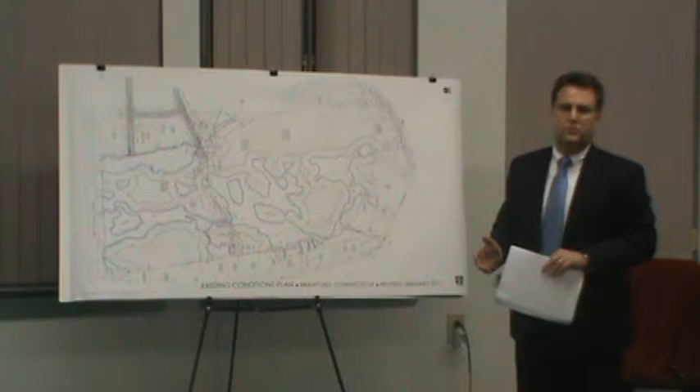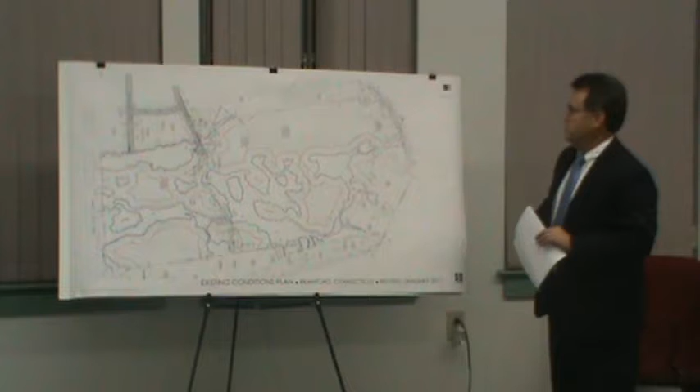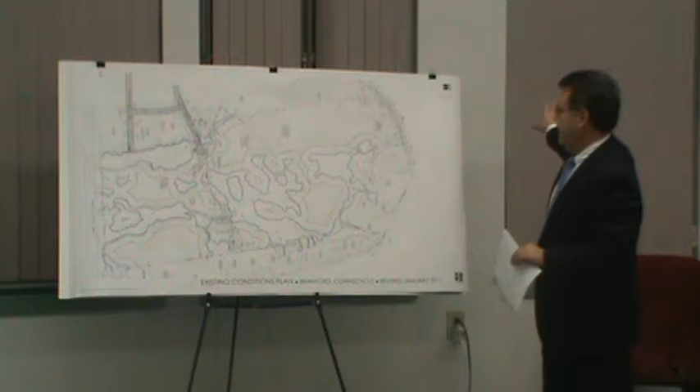Mr. Chair, what you see before you is quite a large scale, probably not an acceptable scale if this project moved forward in greater detail before this commission. It's an 80 scale drawing, compiled this way so it could fit on one sheet. North is to the right, Route 1 is along our bound here, and I-95 is along what would be the southerly border. The site is about 135 acres.

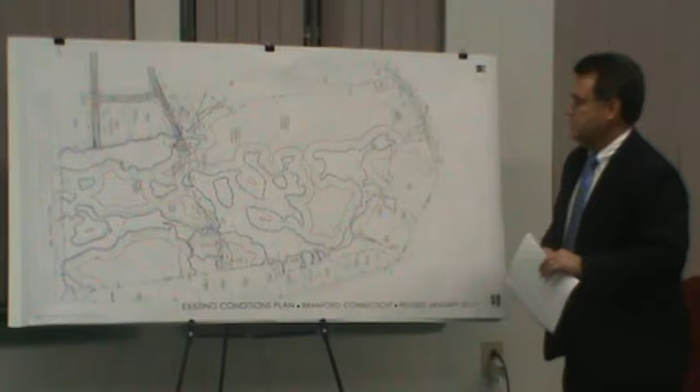The upper 80 acres or so was previously in front of this board for development by a particular user, a company that currently owns property here in Branford. The map shows 2-foot contours and delineation of treed areas. This is aerial photography updated with physical boundary located on the ground, as well as wetland flags that were field verified and field located. We paid close attention to the previously approved wetland flagging for the entire upper 80 acres.

Our knowledge of the lower 40 plus acres is that no project was ever proposed for that site, but those wetlands were also field located, staked, and then surveyed. This work was done in the fall of 2010, and this represents an existing conditions map.

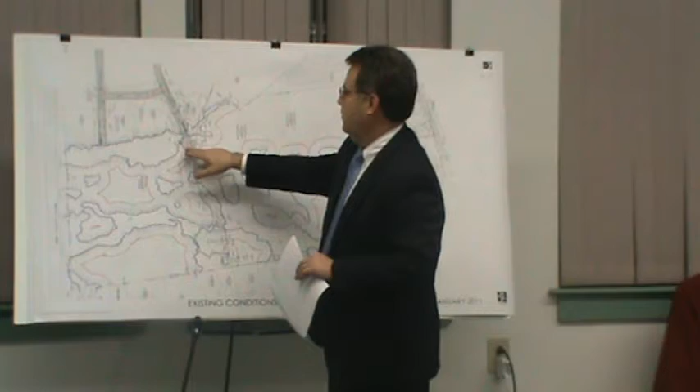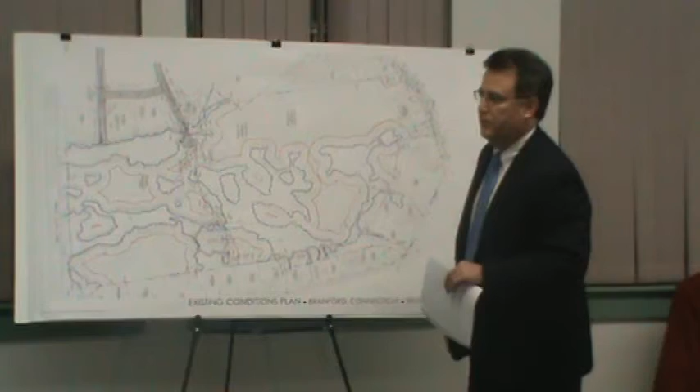Our site is fronted by Route 1, which any development will obviously connect to, but by combining the two parcels together into one cohesive development, we also benefit from 2 other already legally deemed access points. One is an extension of an easement already in place for grading, utilities, and right-of-way off of East Industrial, as well as easements and legal mapping requirements to extend Sycamore Way into any type of development on this site.

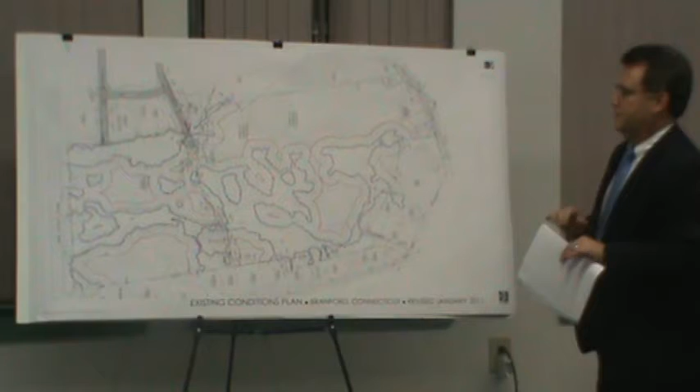In blue, we've highlighted the wetlands, with the flag numbers shown. In red represents a 100-foot setback, or the upland review area.

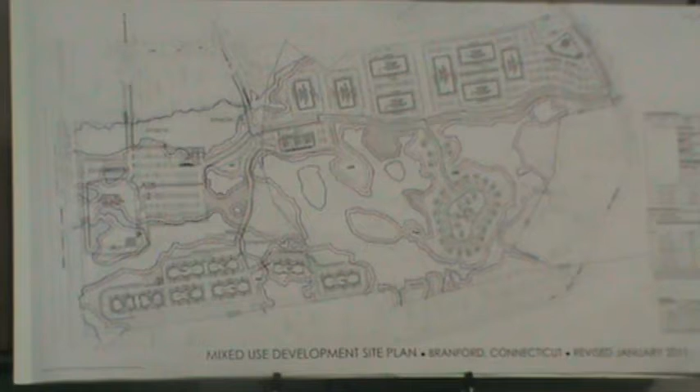We are bounded to the east by the town line. There's a small portion of our property, similar to when the application was before you last, that is actually in Guilford. But much like that project, no work and no access would be contemplated to Guilford, at least as preliminarily discussed.

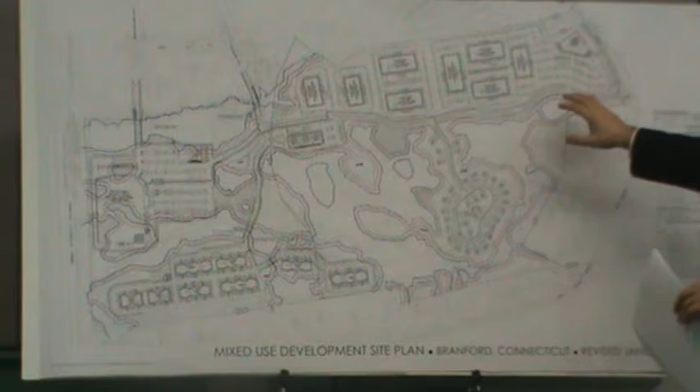So, if I may, Ray, go to the site plan first. Again, we are in conceptual development on this site. Right now, should the applicant move forward through a PDD development plan, it would be of mixed use variety.

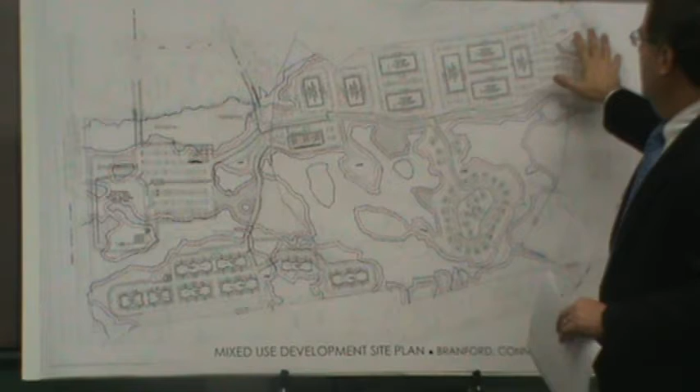The upper, marquee development focus at the top would be a medical office building. I wouldn't call it similar to what you see in Guilford, but the intent is a flexible medical facility. A 3-story building is proposed with adequate parking for it.

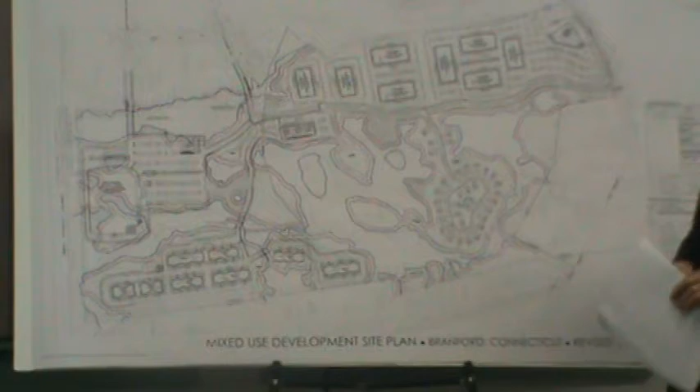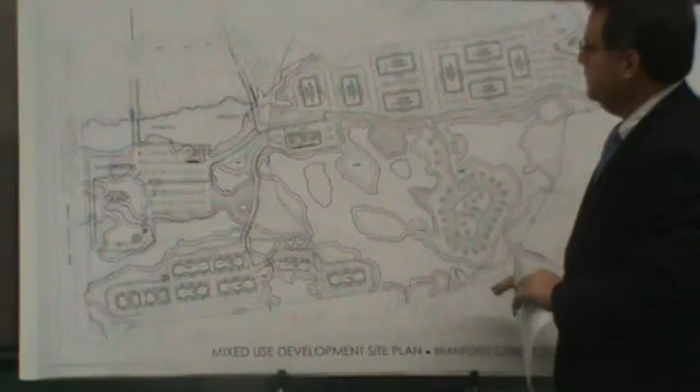These are one-story flex office buildings, with essentially 4 sides to the building so they could be chopped up into several smaller offices if need be, but also single-story. These would be cascading down the hill - this is the upper plateau, this is lower, and then this is even lower, with grade change moments in the slope, which you'll see on the grading plan, that define areas of definitive grade change. That's the upper office park, flex space, and the lower office park.

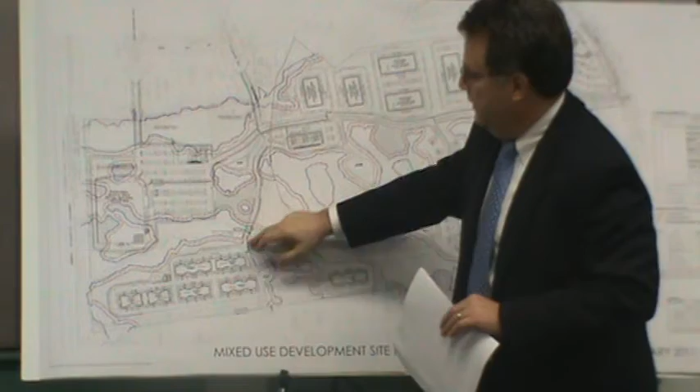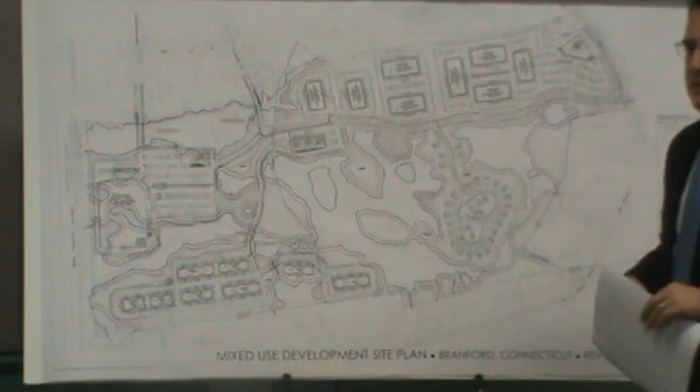The idea here is for some age-targeted homes, around 34 units. These are single-family dwellings, townhome style with a master bed on the first floor - fairly sizable units, on the more luxury side in terms of unit size, in its own little development. Down in this area, there would be some ancillary uses, perhaps a civic building, perhaps something in support of these uses - a bank, a dry cleaners, a little restaurant, but a very minimal amount of retail, 20,000 square feet.

Opposite, an extension of Sycamore Way would be a private drive leading to a section of the development that would be developed as apartments. These would be 3-story apartments, wood stick construction - if you're familiar with Avalon Bay in North Haven, that's the type of unit.

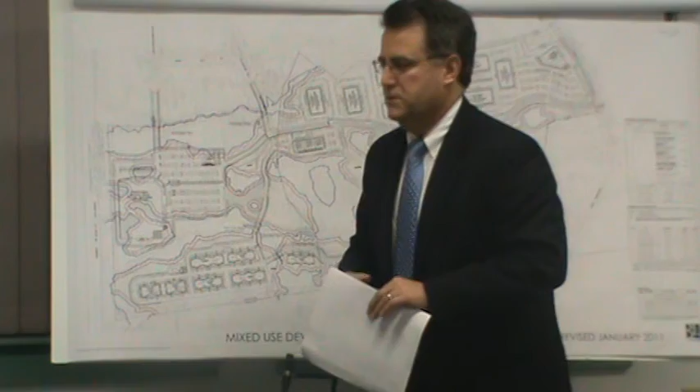The units would vary from around 900 to 1,100 square feet. This zone here would have potentially some carports and car garages that would take the place of some parking spaces, but again, this apartment zone on the development master plan has sufficient parking for what's up there. There would be a clubhouse and community center for the apartments.

And then at the lowest part of the site, along I-95, we are proposing - there is strong interest by a proposed wholesale retailer in this market who is looking, and has been looking, with strong interest in this site. They would be located in this area here.